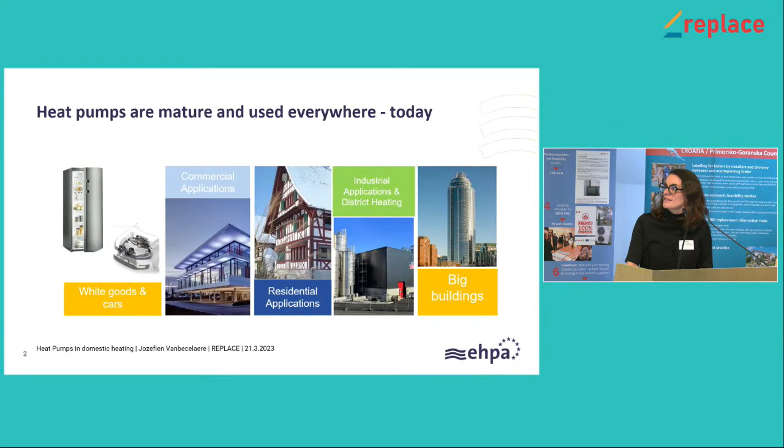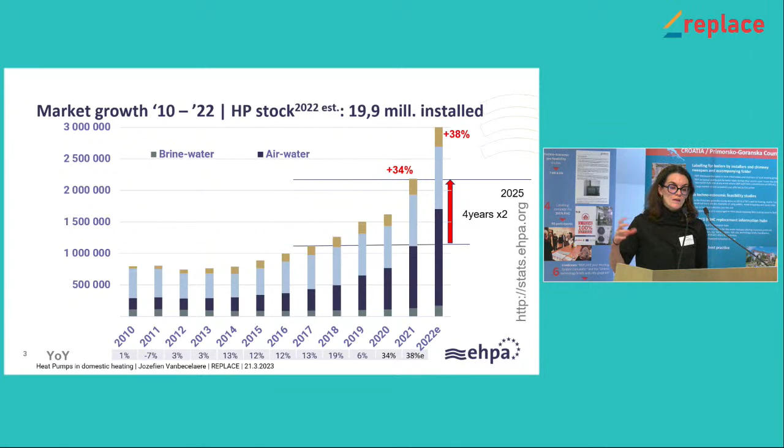Well, the market growth of our sector has been quite spectacular. So for the past 10 years, the heat pump market has been growing, and especially last year we saw an incredible increase with a growth of 38%. And from 2017 to 2021, we actually had a doubling of the market. So now, at the moment, we have around 20 million installed heat pumps, with last year 3 million heat pumps added.

If you look at which countries mainly represent this market, 3 countries are responsible for around half of the market, so that's France, Italy, and Germany, and then the top 10 countries are actually responsible for 86% of the market. So it's really 10 countries that represent a really large share of the market, and then the others quite a small share.

But it's not only at EU level and at global level that the market has been growing last year, but also really individually in different countries we see incredible growth. For example, in the Czech Republic, a growth of 99%. Also in the Netherlands, 80%. Finland, 51%. Belgium, 66%. So we really see a big growth, especially 21 to 22.

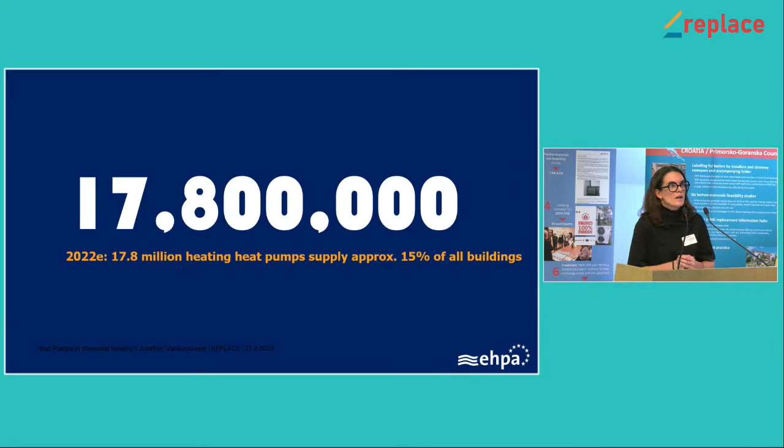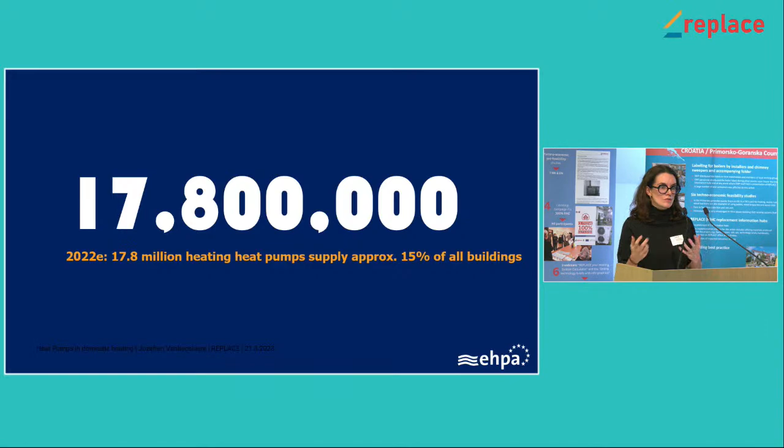So in total, we have 17,800,000 heating heat pumps. Before you saw this number of 19.9, which was again plus the sanitary hot water heat pumps. So these 17.8 million heating heat pumps supply approximately 15% of all buildings. So just again to show a bit the share.

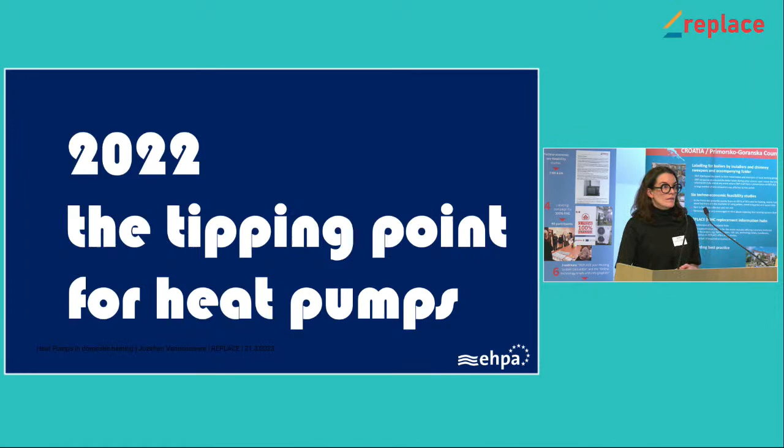As I mentioned, we really saw this spectacular increase last year. So for us, 2022 was really the tipping point for our sector. And the main reasons for that were, well, I think you all could have guessed, the invasion of Russia into Ukraine and the sudden realization that heat pumps are not only important to achieve our energy and climate goals, not only good for air quality, for energy efficiency, and for adding renewables, but also to increase our energy security and to reduce our dependence on Russian natural gas.

So the IEA picked this up, and in their 10-point plan to reduce the European reliance on natural gas, heat pumps had a prominent place. Of course, also the EU reacted to that with their REPowerEU package. And heat pumps had a quite prominent place in there as well, even in the picture. So literally on the front page, that was a first for our sector.

But also inside the different documents that were part of REPowerEU, there are quite some measures targeted specifically at heat pumps. The Commission recommended member states, for example, to shift taxes from the electricity bills to fossil fuel bills. Also, there were Innovation Fund calls specifically for heat pumps. Ecodesign measures were announced, and so on.

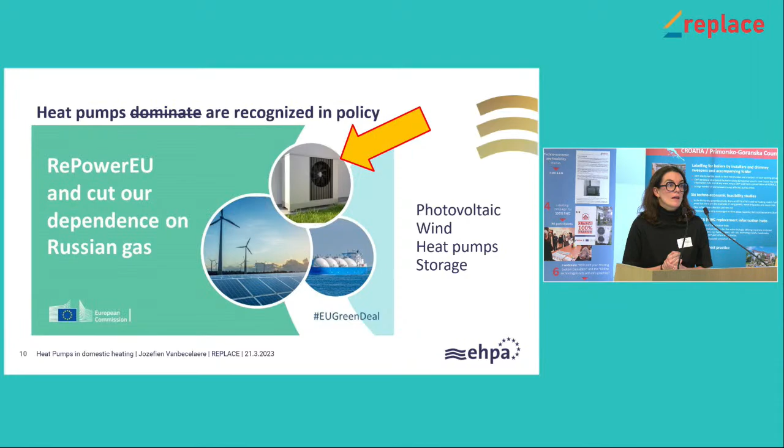But one of the most remarkable things that are mentioned in this REPowerEU document were clear targets for heat pumps. So the document aims to have 10 million additional hydronic heat pumps by 2027 and 30 million additional hydronic heat pumps by 2030. But we, as the European Heat Pump Association, extrapolate these numbers to the whole sector, because hydronic heat pumps are only a part of the heat pump sector, around 50%.

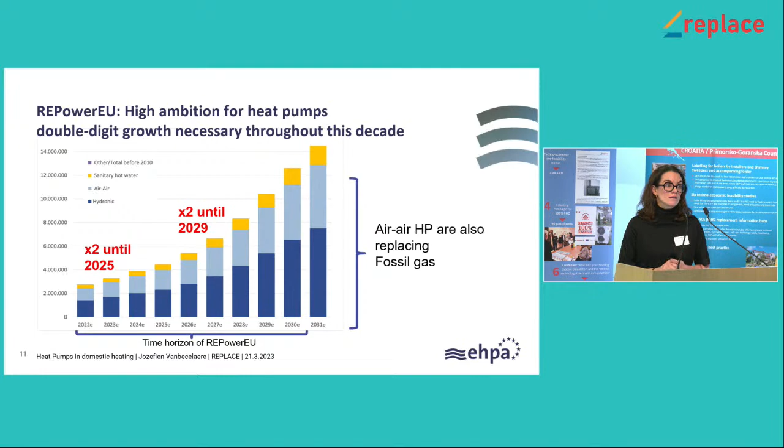So that's the water-based systems, but of course you also have the air-based systems, which also replace fossil gas heating. And if you do this extrapolation, well, then you arrive at double, meaning around 60 million additional heat pumps by 2030, which would mean a quadrupling of our sector in the next 8 years. So this is really steep and really ambitious.

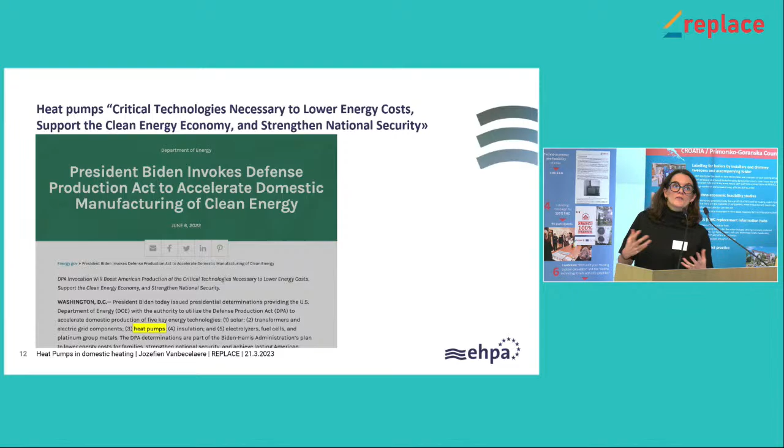And another factor that added to this increase in heat pump sales was also what is going on in the US with the Defense Production Act and the Inflation Reduction Act that are promoting the US production of heat pumps. And also at national level, you see this happening.

So this is a map of current and announced bans on fossil fuel heating, both in existing and/or new buildings. So for example, the countries in green, there's already a ban, or there's an announced ban both on gas and oil heating in existing and new buildings. For example, in the Netherlands, there will be the minimum standard of hybrid heat pumps as from the 1st of January 2026. And in Germany, you have this 65% renewables in heating requirement that is supposed to start on the 1st of January 2024.

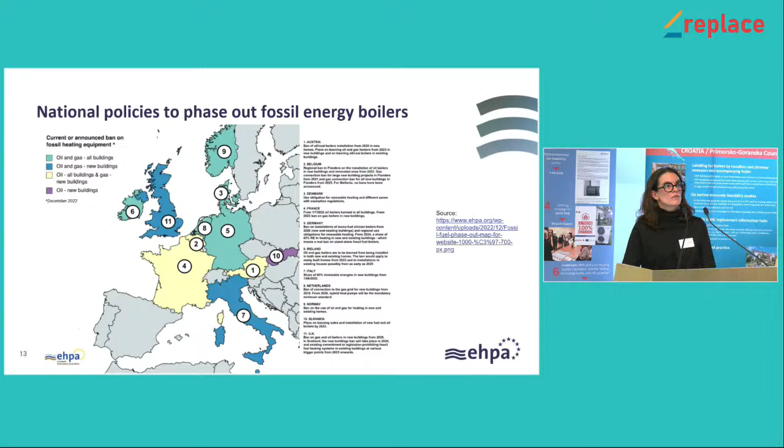In France, for example, you have already a ban on oil heating in existing buildings, and a ban on gas heating in new buildings that is announced. So yeah, you can find also this map on our website.

A question we often get is, can the sector deliver to this big growth? Well, the answer is yes. For 20% of the market, the heat pumps go to new buildings, which are usually fully ready for heat pumps. Then around 40%, there you can do a one-on-one boiler exchange with a heat pump. And there a good test is this fit for 55 degrees test, where you put the flow temperature of your heating system at 55 degrees. And if you're still comfortable, then you can do an immediate replacement of your boiler with a heat pump.

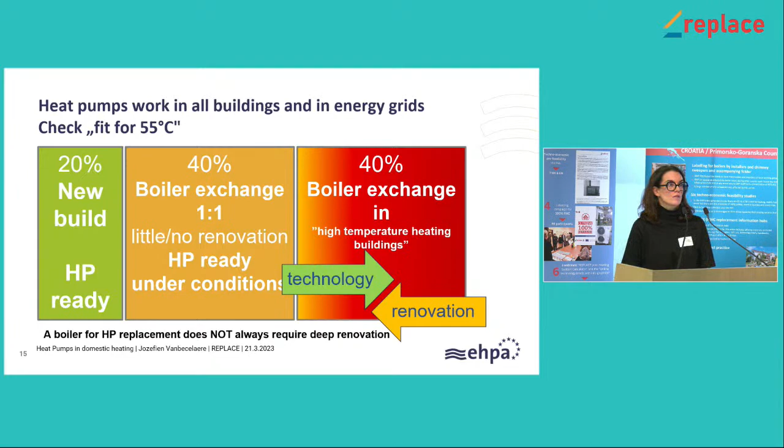And then in the other 40% of the cases, there you will have to do some renovation. This can be either a staged renovation or a full renovation from the start. You can opt, for example, for a hybrid heating and then do more renovations where you reduce the gas part of your hybrid heating and so on. So here again to show that indeed heat pumps work in all buildings. Of course, in some you'll have to do some works, but there's heat pumps available for all types of buildings.

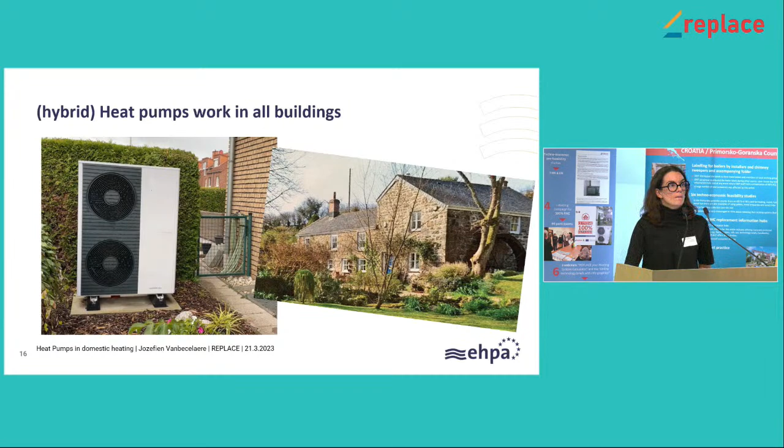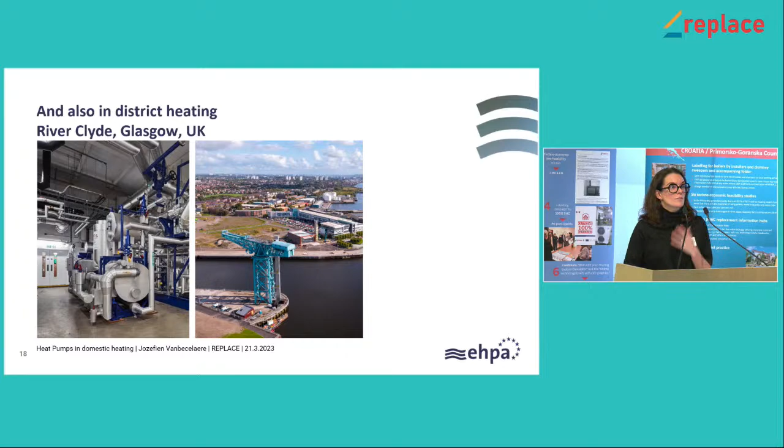And also in district heating, heat pumps are an important source, but the next speaker will focus on that, so I will not talk about that right now. Then, a heat pump in every home. How do we go from this 15% to 100% as soon as possible? Well, there's quite some legislative changes ongoing that will help us with that.

On this slide, a bit of a general overview of legislation that has been now really heavily debated, I would say. So the EU ETS, a deal has been found, and an ETS for buildings and road transport will come into force as of 2027. So this will implement the polluter pays principle, which will incentivize consumers to switch from fossil fuel heating to electric heating, for example, heat pumps. Also the Energy Performance of Buildings Directive, which is still under discussion, but you can already see a bit the trends or the general ideas that will be in the final document.

The introduction of zero-emission buildings, for which heat pumps would be an obvious choice. Then also the phase-out of fossil fuel boilers. Of course, there's some discussion on the exact wordings and on the exact dates, but the principle will be in normally. And then also the end of fossil fuel subsidies, which should be quite soon as well.

Another legislation under discussion is the eco-design proposal to end the sale of standalone fossil fuel boilers in 2029. So this has been announced in the REPowerEU package, but it still has to be discussed, of course, with the different stakeholders and member states representatives. So there, the coming weeks will be quite crucial as well.

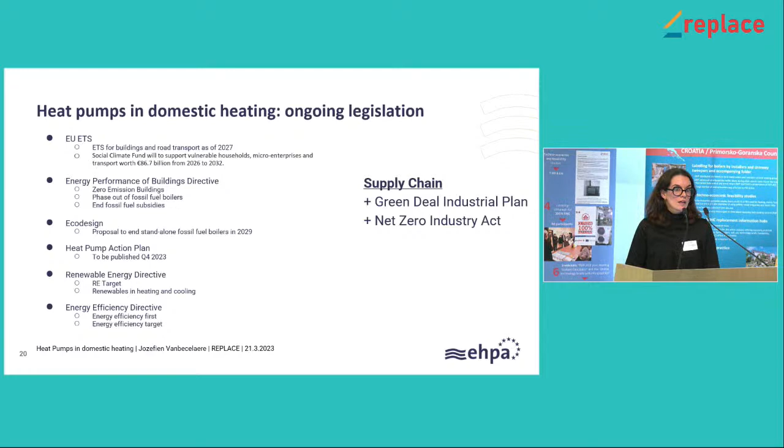So we had for a while a call for a heat pump accelerator that really puts everything into motion and brings all the stakeholders to the table to have a coherent and consistent heat pump policy, a long-term vision on large-scale heat pump deployment. And I would say a number of the asks have already been partially tackled by the Net Zero Industry Act and this upcoming heat pump action plan. For example, the ask to create trust in long-term ambition and to really show that, yes, heat pumps are the future, they are the technology to stay, which will give more confidence to both investors and consumers.

I put two things in red here, which I think are very crucial aspects for the residential sector and consumers to really replace their current heating systems. The first one is to make clean heating also economically the most attractive. As the previous speaker mentioned, as long as renewable clean heating solutions are more expensive than the fossil fuel solutions, it's very hard to have a really large-scale deployment. In many countries, you still have taxes and levies that are higher on the electricity bill than on the fossil fuel bill. So these things really need to be balanced better.

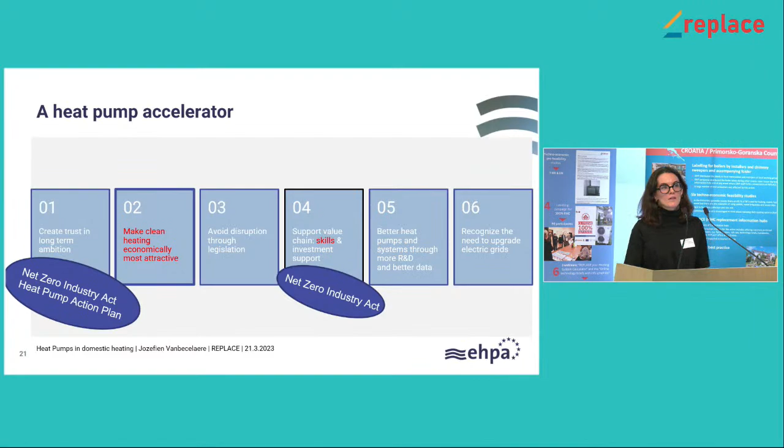I can give a very concrete example from myself. I just moved into a house that we renovated with a heat pump in Brussels, and when I called for the subsidies, the people from the Brussels region were advising me against installing a heat pump because that would not work in a house in the city, that you have to do it in a freestanding house. So very clearly we also need these good skills at administrative level, at regional level, and so on. So yeah, there's still some work to do, some barriers to tackle.

We call this an all-hands-on-deck approach, where we really need all stakeholders and policymakers to make long-term, large-scale heat pump deployment a reality. And the last slide is a bit more information about EHPA.